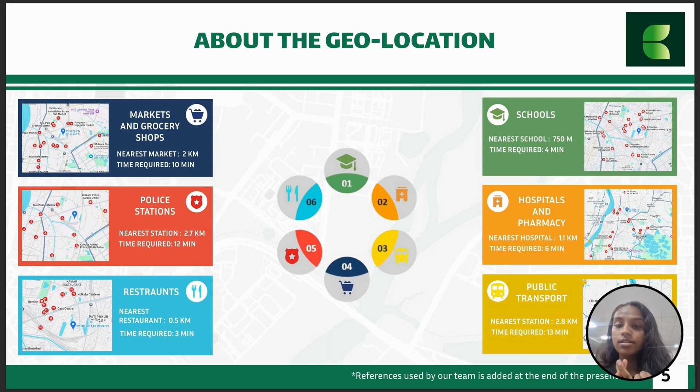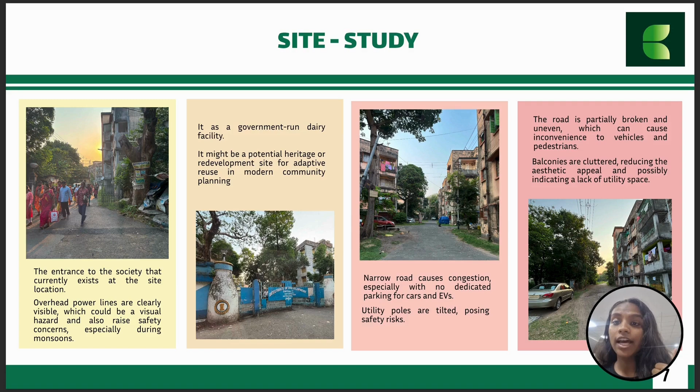To understand this location better, one of our teammates visited the site and interviewed a couple of people. Some of the most pressing issues we understood were entangled and messy transmission lines and tilted poles, which are very unsafe in nature. Regular power cut issues were mentioned by a lot of people. Unclean cooking fuel, improper garbage disposal, and very bad air quality were a few more issues mentioned.

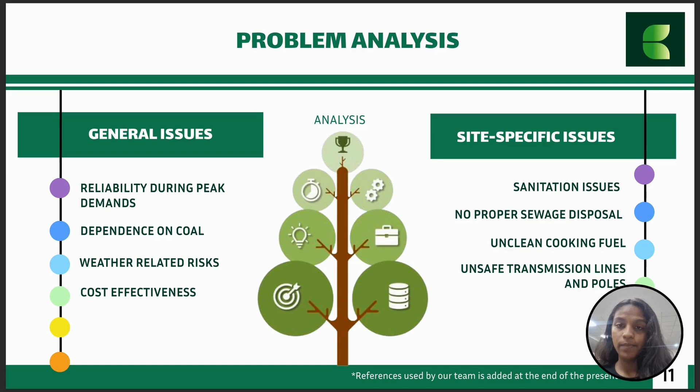We have analyzed these issues and segregated them into two parts, general and site specific. Moving to the first problem, reliability during peak hours - the grid lines of Kolkata are slightly old and unorganized, and hence during peak summer times people often face huge power cut issues due to the high demand that the grid cannot supply.

Second, Kolkata is very prone to natural calamities like cyclones, and we can see that they are quite frequent. Occurrence of such calamities leads to messed up transmission lines and frequent power cutoffs.

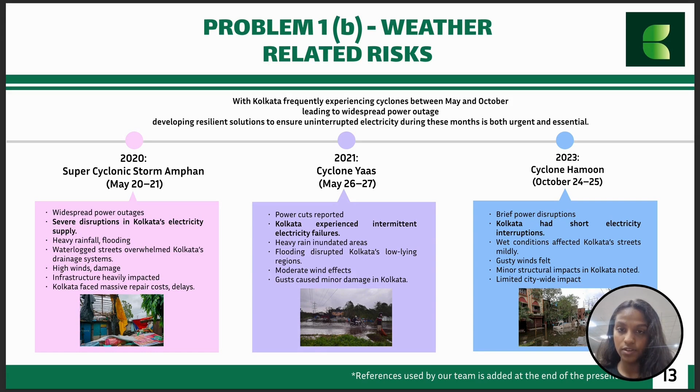Another very pressing issue is the dependence of Kolkata almost entirely on coal based electricity, which is not only non-renewable in nature but also leads to huge carbon dioxide, NOx, SOx, and particulate matter emissions, and hence needs better sources of energy supply. So to solve these issues, we first tried to understand the energy demands of a community housing 2,000 households in a metro city like Kolkata.

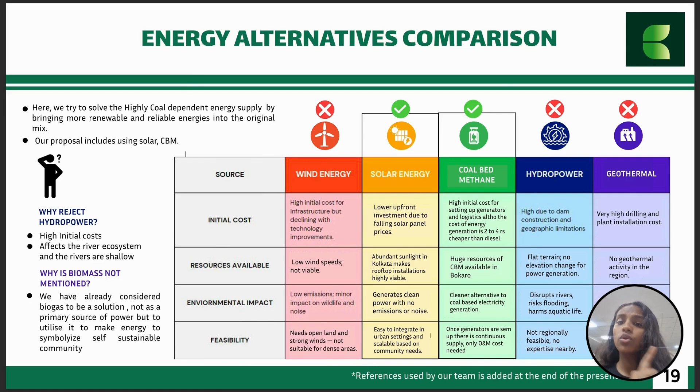Here is our solution proposal. We tried to understand the availability and affordability of different sources of energy, and we found that the combination of solar, CBM, and biomass would be best suitable for us. We have divided the solar, CBM, and biomass into a ratio of 67, 30, and 3.

Let's move on to the solutions. The community we have built has three parts: solar, CBM, and biogas. To sustainably power a 2,000 family community, we have adopted a hybrid solar solution, rooftop and floating solar. We're using high efficiency monocrystalline panels with rooftops covering 50,500 square meters and floating panels installed over 6 acres of water bodies.

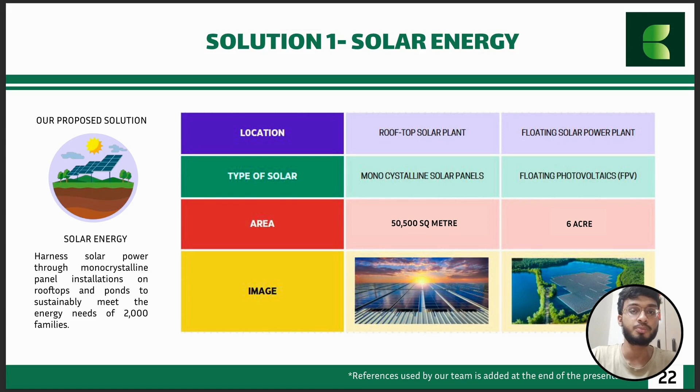Floating solar boosts efficiency by 15% and conserves water by reducing evaporation. It also helps in pisciculture by reducing the temperature of the water and allowing the fish to survive.

Our site's solar potential is 6872 megawatt hours annually, giving us a total installed capacity of 5 megawatts, meaning 67% of our 7,000 megawatt hour demand. A 5 megawatt battery system ensures reliability, and surplus energy will be sold back to the grid, making the system both sustainable and economically smart.

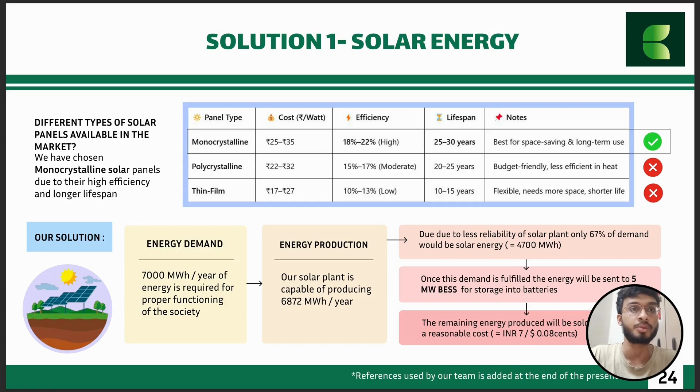West Bengal's deep coal beds hold large methane reserves, a clean, reliable, and affordable energy source. On regular days, CBM covers 30% of daily energy needs. During cloudy days or cyclones, CBM teams up with BESS to power the whole community. With a total capacity of 3,200 kilowatts, our CBM plant keeps the lights on even in emergencies.

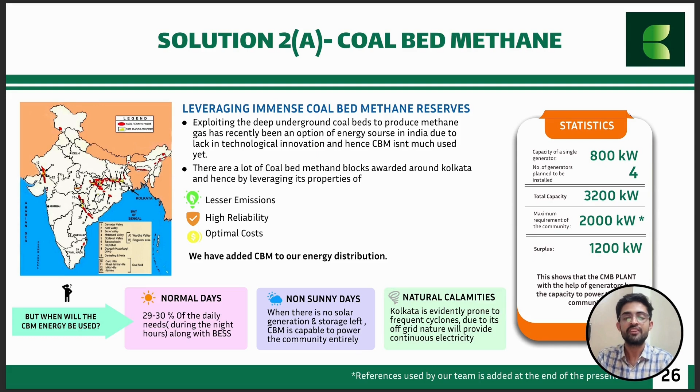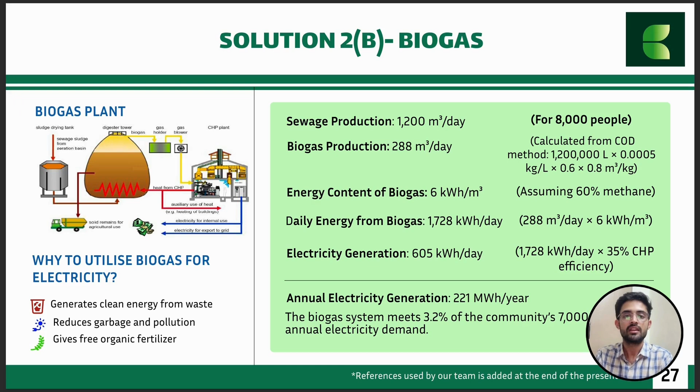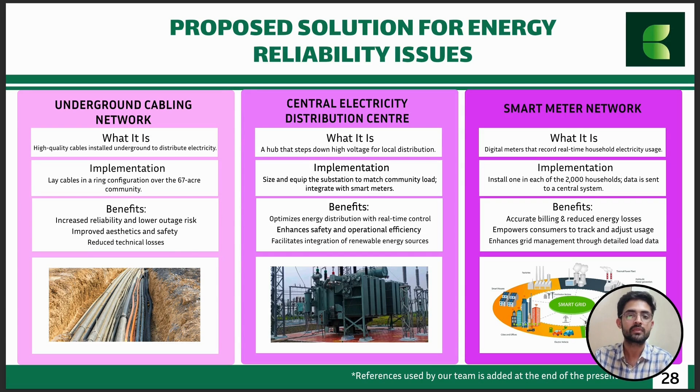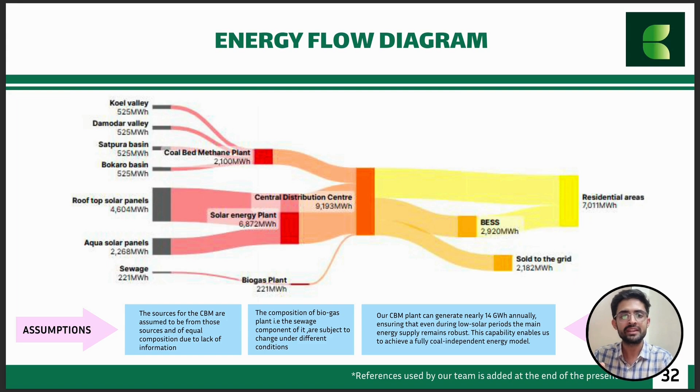Let's connect the dots with an energy flow diagram. Rooftop and aqua solar panels generate 6,872 megawatt hours each year. CBM adds 2,100 megawatt hours and biogas gives 221 megawatt hours. All this energy flows to our central hub, where smart meters send extra power to the grid to sell, and automatically switch to CBM or batteries when solar drops.

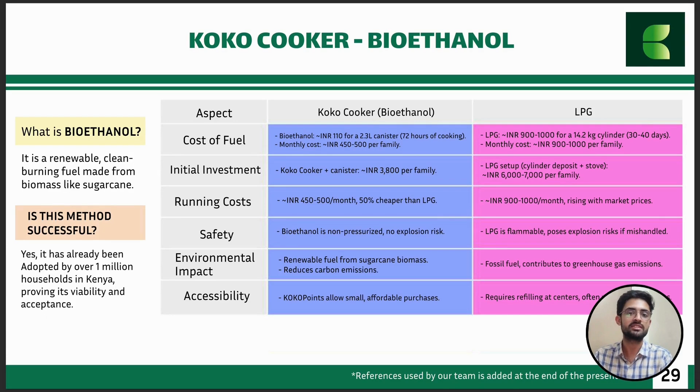Let's talk about bioethanol, a clean and affordable cooking fuel. Koko cookers run on bioethanol made from sugarcane, making cooking fuel 50% cheaper than LPG. Only 0.62% of West Bengal's sugarcane harvest is needed to meet the demand. It is supported by government policies. This solution is safe, green, and perfect for our community.

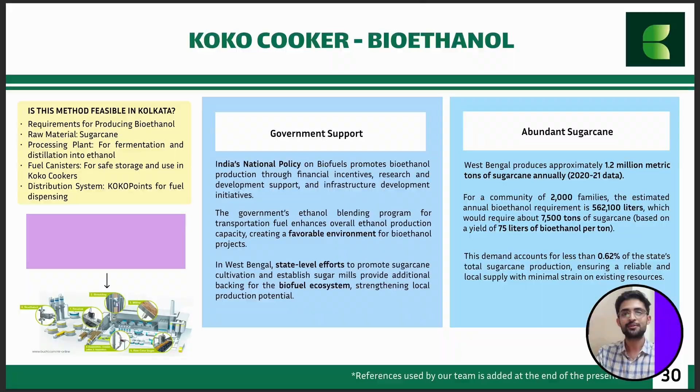With CBM, biogas, smart grid, and bioethanol, our community can have reliable, sustainable energy. Thank you. We would now begin with the building design and community plan section of our presentation.

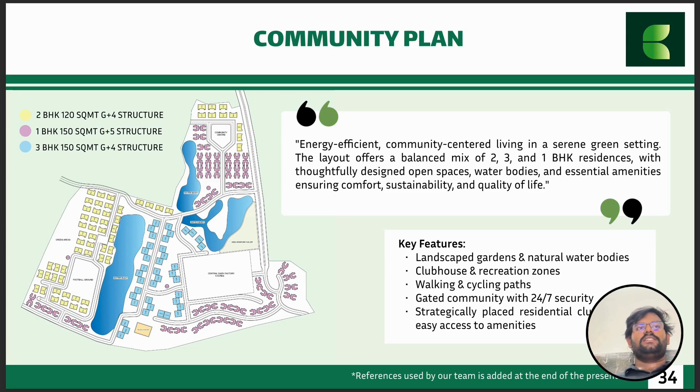As you can see, the local water bodies, flora, and fauna have been conserved to the maximum extent. We achieved this by designing our housing units around the existing site features and roads, so as to minimize the cost of construction and conserve as much resources as possible. The site plan overlapped with satellite imagery shows how efficiently designed our society is.

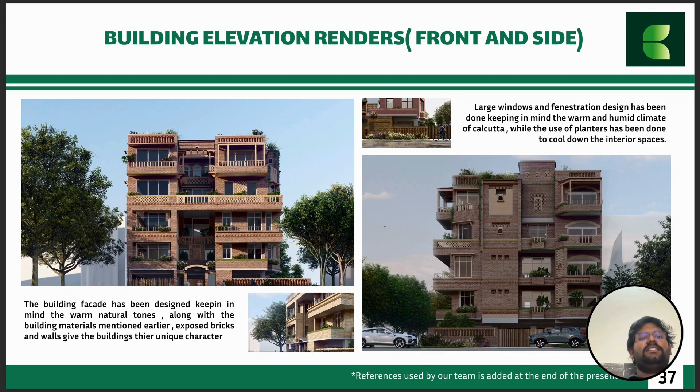The building elevation renders and design features: as we can see, the use of brickwork has been maximized for the building design so as to reduce the use of concrete and steel as structural materials. The large windows and fenestration details have been done keeping in mind the warm and humid climate of Calcutta. The use of brickwork allows us to reuse the maximum amount of materials from the existing site.

The design elements use an extensive amount of brickwork so as to minimize the use of carbon-emitting materials such as steel. Extended balconies with plantation have been done to enhance wind flow and the overall well-being of residents. Solar panels have been installed on the rooftops to be used as terrace shades and also to enhance the energy independence of the site.

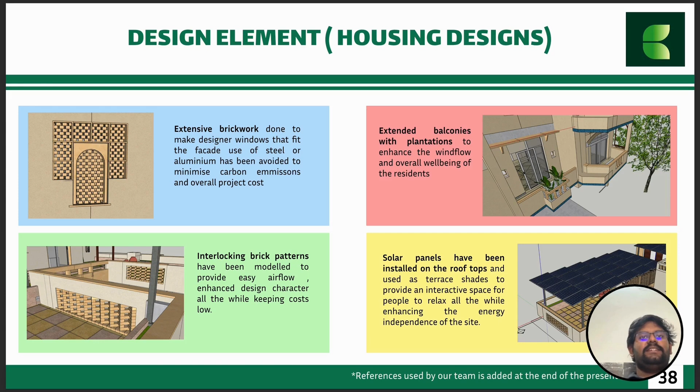The floor plans: we will provide three different housing types - 1 BHK flats, which are LIG housing, 2 BHK flats, which are for the MIG housing category, and 3 BHK flats, which are for the HIG housing category.

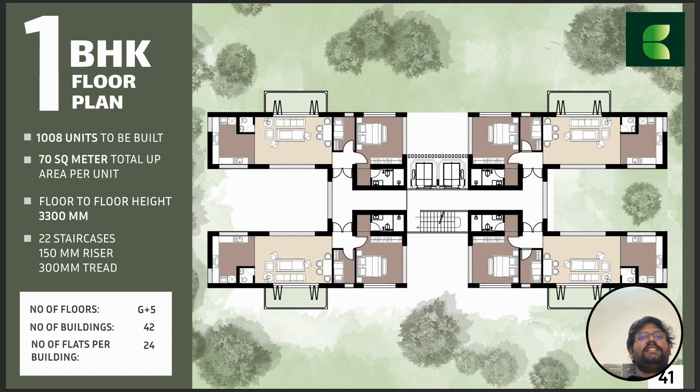As you can see, the housing units have been designed keeping in mind air circulation and views. For every unit, you have three-side open views, wind flow areas, and spacious balconies so as to enhance the well-being of all residents. In this unit, you have 4 flats per floor, 24 flats per building.

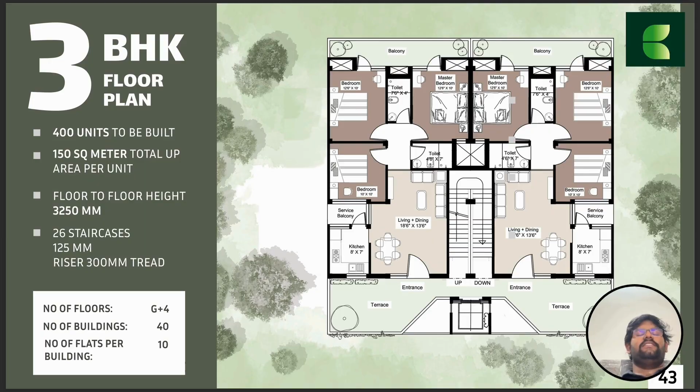As mentioned, the use of wind tunnels and ventilation chambers have been maximized so as to provide natural cooling and reduce air conditioning costs. The additional greenery in balconies and terrace areas reduces the indoor ambient temperature.

The amenities we have provided in the proposed community: the community is packed with facilities such as rainwater harvesting, on-site sewage treatment plant, grey water treatment, biogas plant, on-site pisciculture, and methane-based power generator. This ensures energy independence and also reduces the energy cost for all its residents.

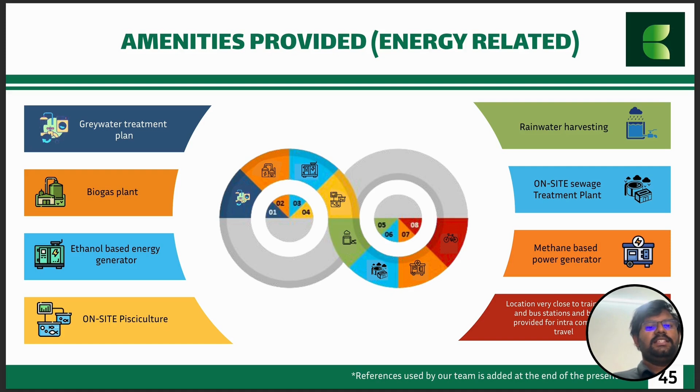Located very close to train, metro, and bus stations, this provides additional infrastructure for the community as well. Facilities such as jogging tracks, children's play areas, shopping complex, and natural swimming pools have been developed for the comfort and convenience of the residents.

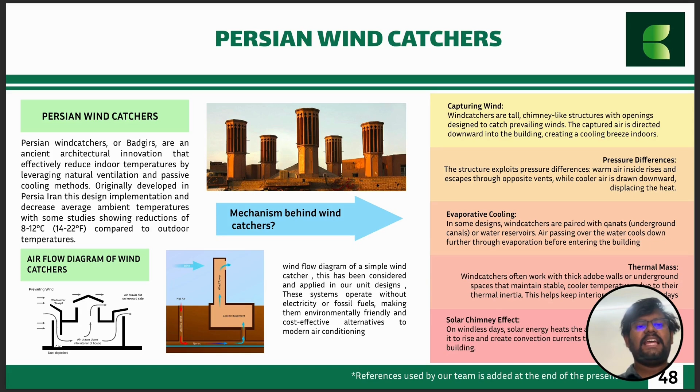Engineering and material design solutions: we have extensively used Persian wind catchers to reduce the ambient indoor temperature. These wind catchers are known to use the stack effect and Venturi effect to keep the indoors at a very comfortable temperature zone. Next up, we have polystyrene XPS foam boards.

These are quite structurally stable and are known to provide both sound and thermal insulation.

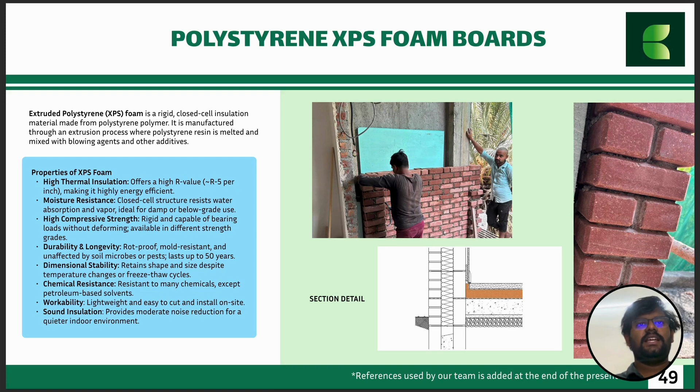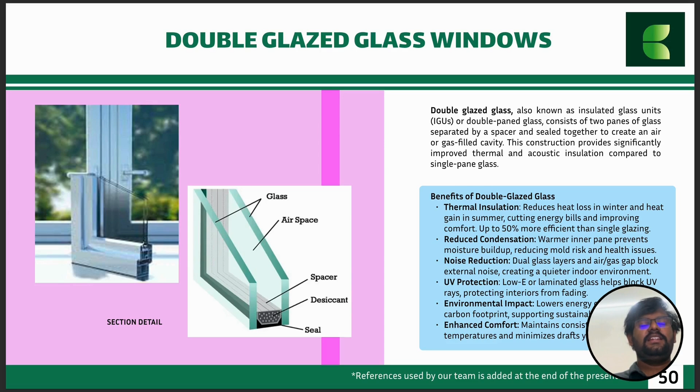These are quite capable of providing natural blockage to heat and keeping the indoors comfortable, hence reducing the need for air conditioning. Double glazed glass windows use the air space in between them to block UV rays, blocking heat gain during summers and heat loss during winters. These are quite effectively used to reduce heat in hot and tropical climatic areas.

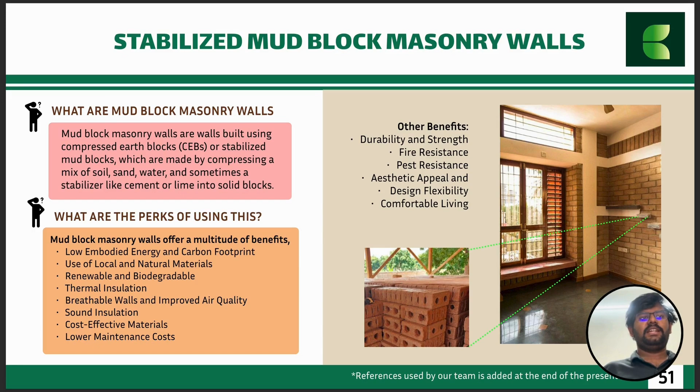Next, we come to the innovative materials used to construct and design the houses. First, we have mud block masonry walls. These are blocks made using compressed earth, quite aesthetic while being strong and durable. They have one of the lowest embodied carbon energy and carbon footprints of all building materials. Combining mud block walls with adobe blocks or rammed earth walls provides one of the most thermally resistant buildings that are also structurally stable, aesthetically appealing, and have the lowest carbon footprint. We have highlighted the benefits and how they differ from other building materials.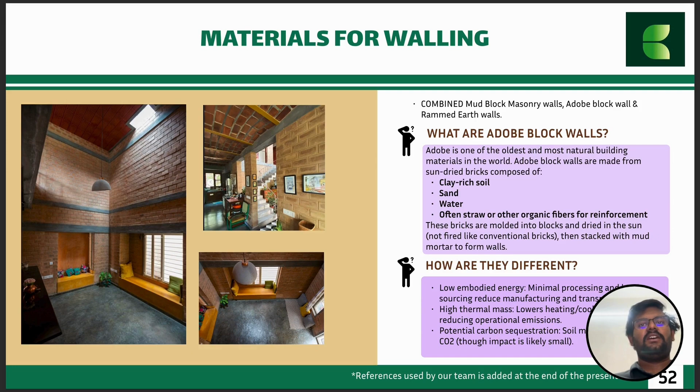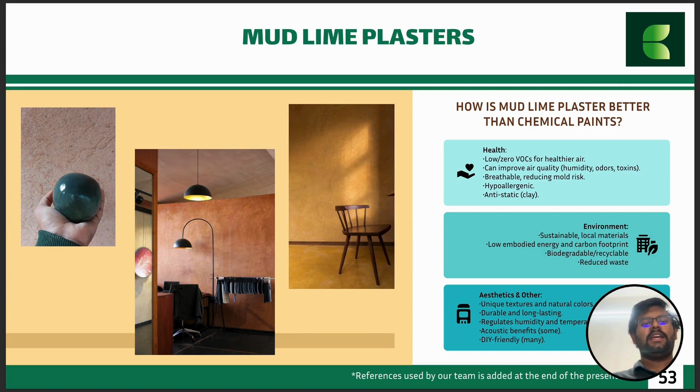Instead of using paints, we would use mud lime plaster rather than chemical paints. These have low or zero VOCs for healthier air, can improve air quality, and are quite aesthetic compared to normal chemical paints. For flooring, we would use locally sourced oxide flooring or Athangudi flooring. These have low transportation costs, help local laborers, and are quite environmentally friendly compared to other chemical or ceramic based tiles.

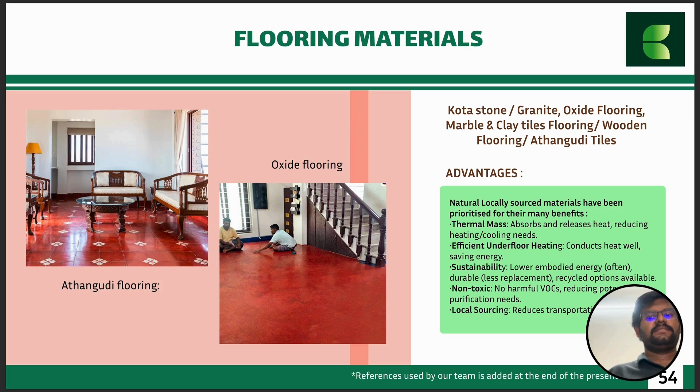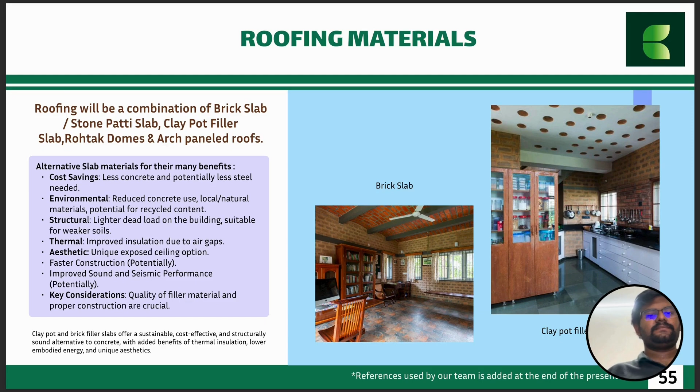Water conservation and sewage treatment pipelines: rainwater harvesting. About 400,000 cubic meters of water falls across the 67 acres of the site. Extensive use of rainwater harvesting has been done so that we can conserve at least 30% of incident rainwater and use it for landscaping or non-essential water supply purposes.

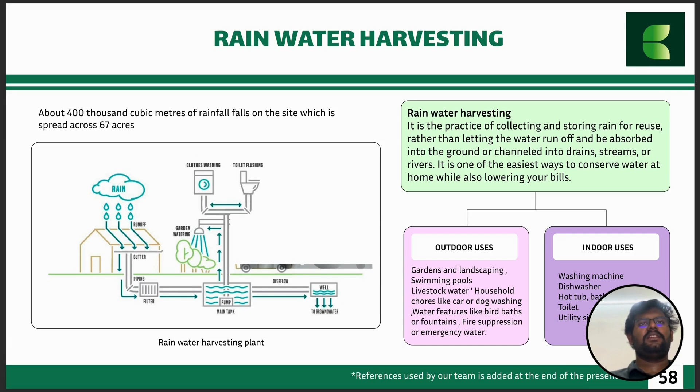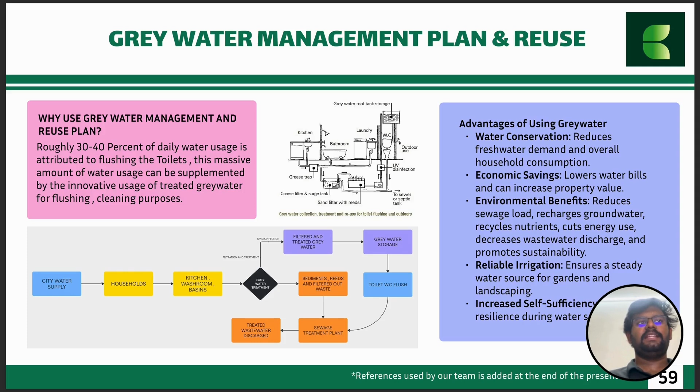Next, we have the grey water management plan and its reuse. Grey water generated from kitchens or bathrooms can be stored, filtered, and cleansed to be used again to flush the WC. About 30 to 40% of daily water usage is attributed to flushing toilets. This massive water usage can be supplemented by the innovative use of treated grey water for flushing and cleaning purposes. A detailed flowchart has been given on this slide.

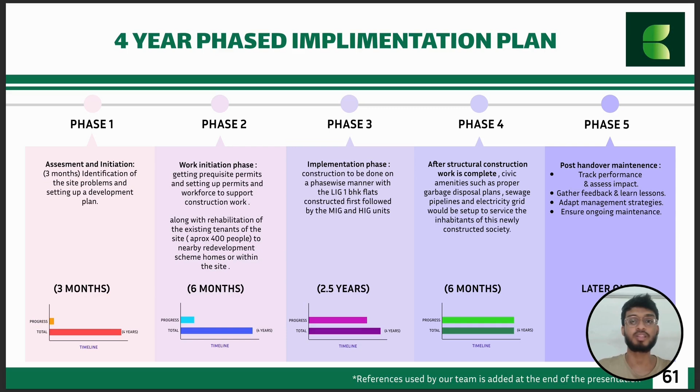Moving on to the phase plan, our project will follow a 4 structured year plan. The first 9 months cover site assessment, permits, and tenant reallocation. Phase 3 includes 2.5 years of core construction, followed by civic infrastructure in Phase 4. Phase 5 focuses on post-handover maintenance.

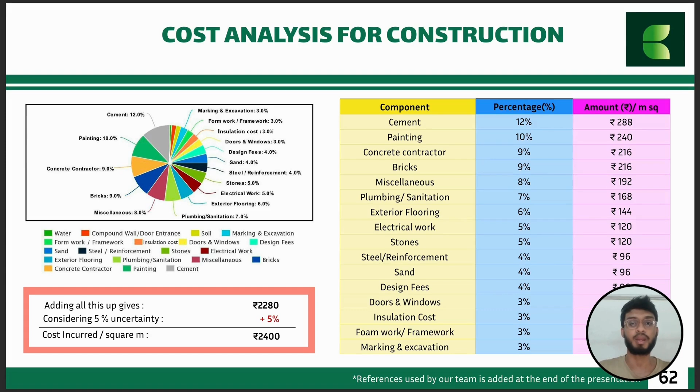Now let's look at the costs. Construction costs are 2,400 rupees per square meter with a 5% contingency. Key materials like cement, bricks, and paint have been carefully chosen to ensure quality within budget.

Now let us evaluate the benchmarks. First, affordability: our housing model is built for dual income earning homes with 60,000 rupees a month. Compared to nearby communities, our EMI is lower and monthly savings are higher by over 11,000 rupees, making our plan significantly more financially stable. Second, our energy and carbon efficiency.

Our community ensures zero power outages thanks to reliable solar and CBM backed systems. In contrast, neighboring areas face up to 360 hours of annual outages. Our carbon intensity is also markedly better, just 0.0023 kg CO2 per rupee, making this a model for eco-conscious living.

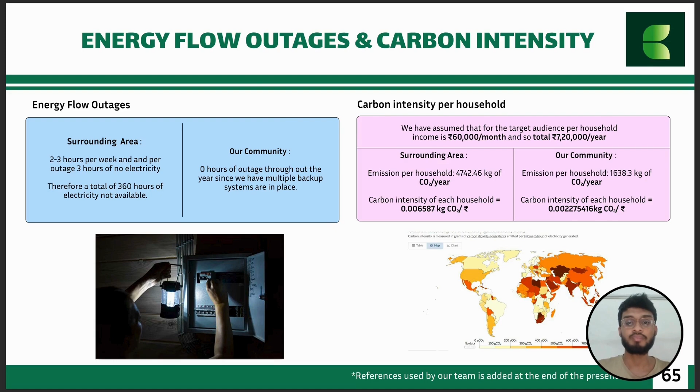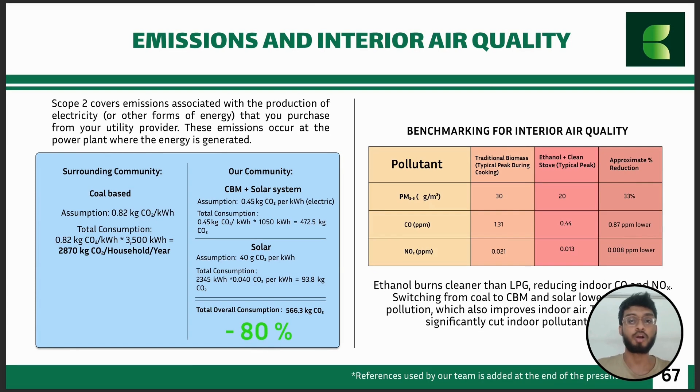Third, emissions and indoor air quality. While scope 1 emissions increase slightly due to biogenic ethanol usage, we completely eliminate CO2 from diesel generators. Scope 2 emissions drop by 80% thanks to solar adoption. We also outperform surrounding areas in air pollutants like PM, COx, and NOx, delivering healthier homes.

Mitigating risks: we are prepared for every scenario. On peak days, our 3.2 megawatt CBM and 5 megawatt solar plants meet the loads. In winter, solar alone can meet 98% of energy needs. During hurricanes, our underground lines and BES systems ensure uninterrupted supply. So consumers buying houses will definitely love it, with affordability, better air quality, and least outages.

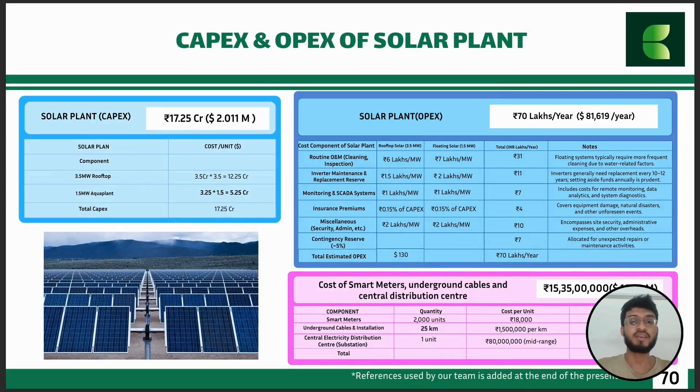Now, financial analysis. The project cost stands at $75 million, with $14 million coming from government grants and $61 million coming from multilateral loans at 6% interest. This will be repaid within 18 years, after which the project will generate $7 million in annual profits, making it not only viable for buyers but also highly profitable for developers.